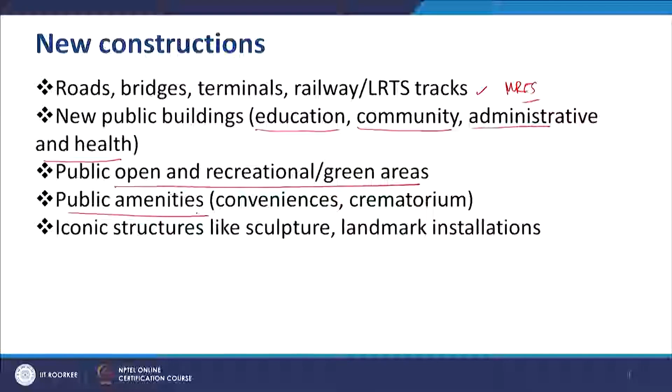Then we make public amenities, for example public conveniences and public crematoriums - all these are required. Iconic structures like sculptures and landmark installations - sometimes we make landmark installations at road intersections or in terminals, so that it can create an iconic landmark structure for the building. We create sculptures and all landscaping elements, street furniture, and sometimes underground utilities, which also help people in various ways. Those kinds of construction are required in urban local bodies.

At the same time, we do repair and maintenance - roads need regular repair work and maintenance work. Most of the time municipal engineers are busy with road repair and are not able to devote their time and attention to any other work, because roads are such a matter which needs regular supervision and maintenance due to adverse weather conditions throughout the year.

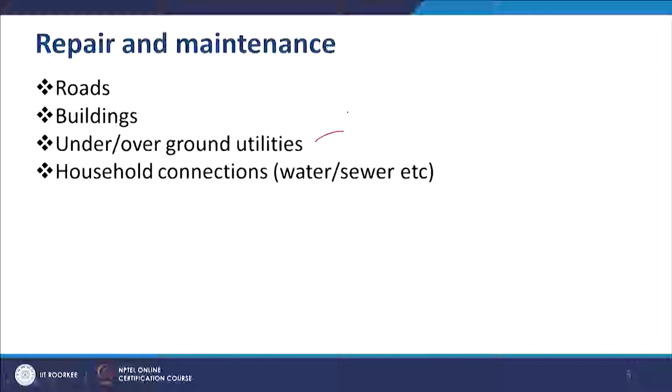Buildings also need significant repair and maintenance. Underground and overground utilities, for example, the sewerage line, drainage line, electrical line, water supply pipeline - so many networks are there in the cities which we need to maintain on a regular basis. Household connections, water, sewer, drainage cleaning, etc.

Now all these are dedicated work, and what major municipal corporations or cities have started doing now is to integrate all the service pipelines in a common duct. They are making a common permanent duct, and within that major duct they are accommodating all the pipelines like this.

So this kind of installation is also possible, but definitely this is costly. But even if it is costly, this is permanent - a person can enter and repair this. So this is called a permanent common utility duct, and this kind of trend is also coming in a big way in our cities.

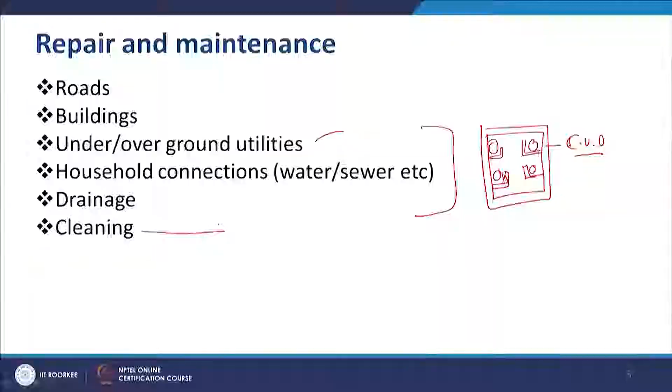Then cleaning is another regular maintenance work in our cities. Every day municipal workers need to clean the road and other public places. So what kind of considerations must we take for the engineering design?

First, I would like to take an example just to recall that you might have seen the great public buildings or public infrastructure created by the earlier generation. They are very nice, permanent and nicely maintained. But in the current generation, sometimes due to lack of cost or lack of attention to minute engineering details, it sometimes lacks that kind of finish and durability in terms of the lifespan of the building.

So why not we also create buildings and infrastructure which are durable, good looking, giving a pleasant effect, and also giving essential utilities and benefit to the citizens for long years. So the major considerations for such engineering design: number one, it should be durable for a long lifespan.

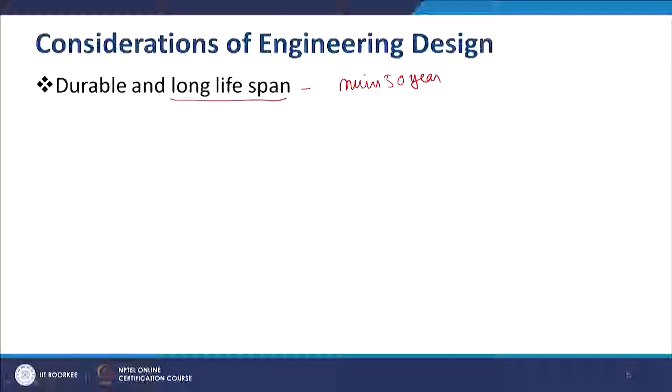When I say long lifespan, it should be minimum 50 years. If you see the major municipal infrastructure created during the British period, colonial time, more than 100 years back, it is still performing well in some cities like Kolkata, Chennai, Delhi or Mumbai.

And for the infrastructure we are creating in today's time, it should have a minimum lifespan of 50 years. Then, safe and permanent - the infrastructure should provide a safe, secure and permanent facility to the citizens with minimum maintenance and repair. It should have optimum cost.

I am not using the term minimum cost, because if we only focus on minimum cost and not quality, definitely the durability and other aspects of the project may not appear. Therefore, considering quality in all respects, the cost should be optimum.

Definitely we are not going to spend too much cost for a particular infrastructure, but keep this in mind: if just for the sake of construction you build one building or infrastructure and after one or two years it becomes fragile and becomes an additional liability for you, it is not desirable. In our municipal governance there are already a lot of liabilities in terms of infrastructure and manpower, so do not add another liability within one or two years.

So make a permanent investment in infrastructure which is durable, good looking and safe. Such infrastructure is possible if you really focus on quality, and the cost can be optimized.

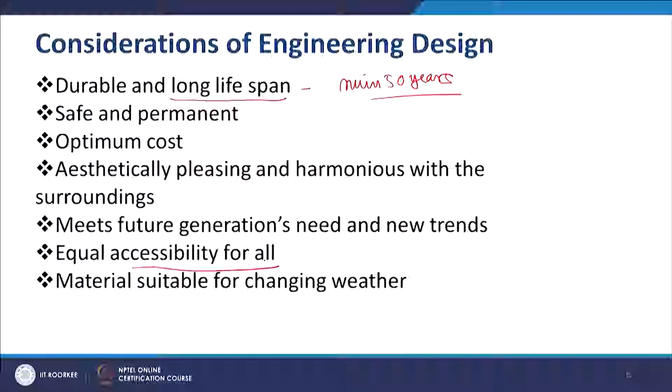In India we have a variety of weather situations, so based on the weather situation at your workplace, you should choose material which should be permanent in nature. And for sustainability, you should think about repair, change, replace and dispose.

I told you that you should not choose a project only based on capital investment. In a project, if you find that capital investment is less, but recurring expenditure like repair, change, replace, dispose is much more, then you should not choose those kind of projects. Whereas if the capital investment is little higher than the minimum, but the repair, maintenance and operation is much lesser and manageable and sustainable, those kind of projects should be given maximum priority.

Having said that, I will mention a few common design and planning terminologies which you will understand as a non-technical person, and this will also benefit technical persons. Now, a few general terminologies we use in municipal governance are cost benefit analysis, break even cost, and levels.

Cost benefit analysis is basically the ratio between the benefit and the cost. So if the benefit is higher than the cost, it should be more than 1.

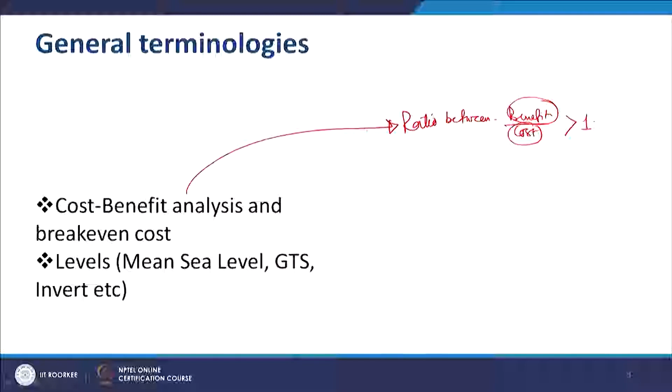In a break even situation, our benefit in terms of financial benefit is equal to cost, that means there is no loss and no profit, and most public infrastructures are built this way. But I feel that even in public infrastructures the cost benefit ratio should be more than 1, so that there is some surplus amount which can take care of the sustainability of the projects.

There are various kinds of levels we use in engineering design. For example, in most cases we measure the level based on the mean sea level, in short called MSL. In some cases the GTS level is used.

GTS is nothing but, in the British period, there was a Great Trigonometrical Survey by the then Surveyor General George Everest, and based on that survey, even now, we take GTS levels in making land filling or public infrastructure in cities and regions. So sometimes GTS levels are also used.

In some cases the invert levels are used. Invert level is the bottommost level of any trench. So if this is the ground level and this is a trench, then this is the invert level. So these are the few common terminologies.

Then I'll tell you a few other terminologies like statutory approval. Statutory approval is basically legal approval. The opposite of statutory approval is non-statutory approval.

For example, you are making a project report and getting it sanctioned by your funding agency, so that is not statutory approval. Whereas you are making a city development plan, and the city development plan needs to be approved first by the board of councillors or the mayor and council, as the case may be, and then it needs to be approved by the state government or the district planning committee or metropolitan planning committee. So those are the approvals termed as statutory approval.

Similarly, when a common citizen submits a building plan or development permission, the approval given for that development is called statutory approval for construction of the building. Now statutory approval could be for the building, could be for the land use, could be for the infrastructure, or both. So statutory approval must every time be mentioned under some law, usually in the Municipal Act, Town and Country Planning Act, or Land Registration Act and so on.

Similarly, terms like mutation, sanction drawing, working drawing are very much popular in municipal governance. Mutation is the process of changing the name of ownership of land. So when you purchase or sell land, you need to transfer the land from person X to person Y. That happens in the land registration department, and when you transfer that changeover from the land registration department to the municipal office, that process is called mutation.

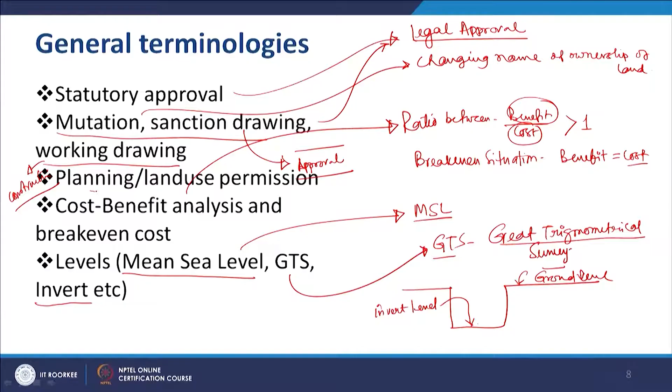So sometimes your role will be as an approval authority, sometimes your role will be as an authority asking for the approvals. Planning and land use permission is given, in most of the cases, under the Town and Country Planning Act.

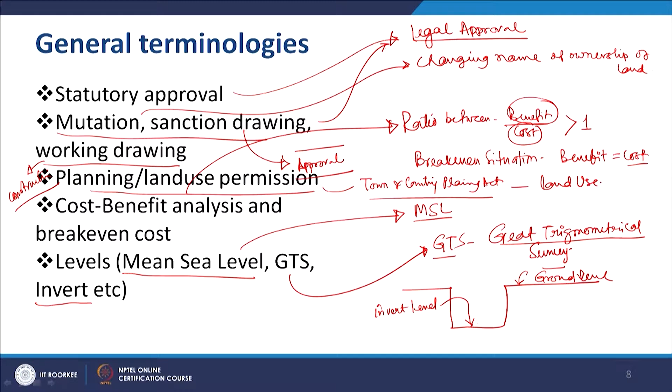It is the permission of the land use. For any construction of a building or infrastructure, you need to take the permission of the land use in particular. So that permission is called planning permission or land use permission.

In most cases, development authorities or metropolitan development authorities are entrusted or delegated this power. In some cases, municipal authorities can also exercise this power if it is given by the state government for the land use permission. After the land use permission, they can go for the statutory permission for the building and the infrastructure.

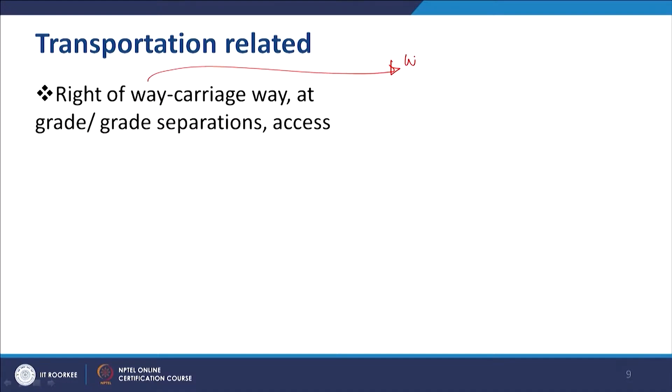After that, there are a few terms related to road and transportation which we use in everyday work. For example, right of way and carriageway. Right of way is the whole width of the road.

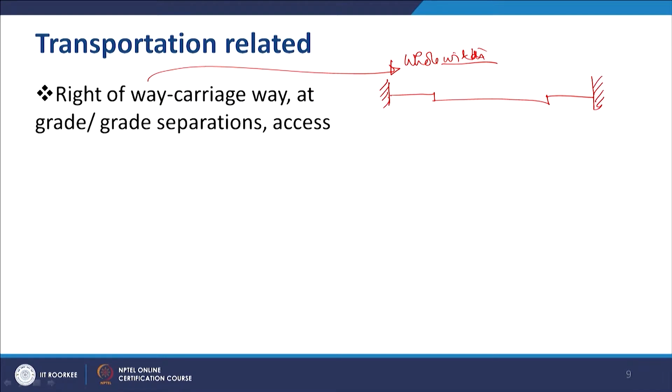For example, this is a local road. So this is the property line, and this is also property line, and this is the footpath, and this is the area for the vehicle. So this particular stretch which is used for the vehicle is called carriageway, whereas the whole width of the road which is available is called right of way.

So usually carriageway is lesser than right of way, because right of way consists of everything like carriageway, footpath, cycle track, landscaped area, areas for the networks, everything. I have just drawn a very simple section of a local street so that you can understand.

Then grade separation. Grade is basically the level where the road passes. For example, I am showing a traffic intersection, a typical traffic intersection which is happening in the same level, without any level difference, where all the journeys are maintained at the same level, either using a signaling system or some roundabout. So this kind of level and intersection is called intersection at grade.

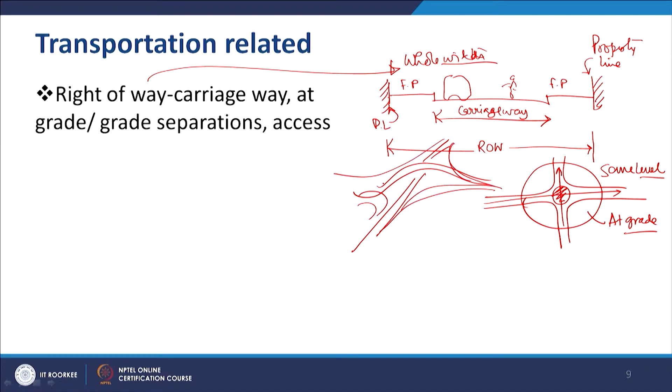At grade means mostly at a single level, and in some cases we can use flyovers like this. You must have seen flyovers like this. So if this kind of arrangement is done, this is called grade separation.

Grade separation is basically separating the grade into various levels, so that one particular movement is given an uninterrupted flow by making various grades. So this is a term used in making transportation planning, making new flyovers, upgrading existing flyovers or existing traffic intersections.

Access is a common term, but it is also a technical term in terms of whenever you are going to give permission for a building, every building or premises must have a means of access, and without the means of access the building permission cannot be given.

So the first thing which you should check is the land ownership document for giving any permission. Second is the means of access. If there is no acceptable means of access, sometimes municipal authorities make a benchmark that a means of access less than 3 meters cannot be given building permission. So those kinds of stipulations are there. Access needs to be checked before giving any permission.

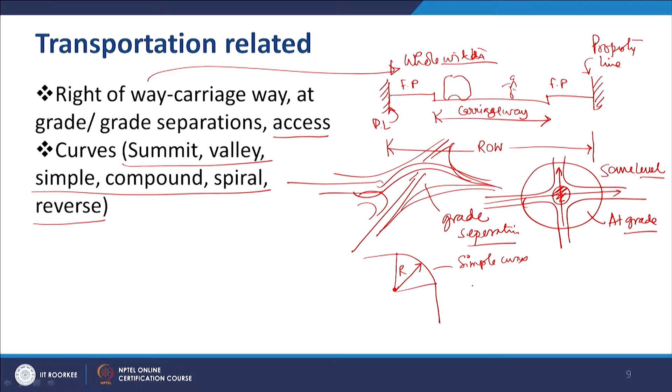Further, we use various curves like summit curve, valley curve, simple curve, compound curve, spiral and reverse curve. In this kind of traffic intersection, when there is a curve like this, it is called a simple curve, having only one center and radius. Then we can make a compound curve, which has more than one radius.

We can have a spiral curve, which we use mostly in traffic intersections, or we can have a reverse curve, something like this.

Then we can have summit curve and valley curve. Summit curve is when a flyover is made like this, utilized for reaching the topmost portion of a flyover. Valley curve is taking the vehicle from the ground level to the higher level. So these are the terminologies related to curves we use for geometrical design of roads, horizontally and vertically both.

Geometrical design of the roads horizontally, vertically, or other than roads we can also design flyovers.

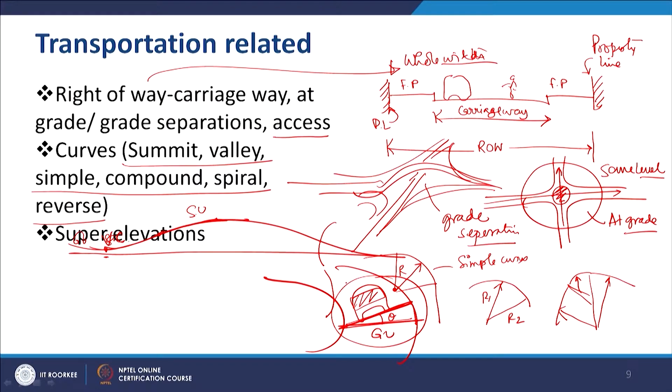Then super elevation, as you know, is used when we calculate the turning of a road and vehicle. When a vehicle turns along a road there is a super elevation by which, if this is the ground level and this is a turning, this should be the new level. This angle is required to maintain the speed of the vehicle and to maintain its safety. So this phenomenon is called super elevation. It is an essential design element which we maintain whenever there is a curvilinear pattern of any road or flyover.

Then there are terminals. Terminals are basically the termination point of any transportation network. It can be a railway terminal, a bus terminal, or a metro rail terminal.

TOD is basically transit oriented development. In many cities in India there are metro rails or mass rapid transit systems being developed. Along the mass rapid transit system, high density compact developments are being encouraged. That kind of development based on compact high density walkability and a mass rapid transit corridor is called transit oriented development. In cities like Mumbai, Calcutta or Delhi, the suburban railway system is also based on transit oriented development.

Trips, as you know, a trip is basically a unit of transportation - travel from place A to place B by any means is called a trip. A trip could be educational, for home and office, or for any recreational purpose.

Travel demand is the demand in terms of trips, the number of trips from one zone to another zone. That is calculated based on the demand, and it is calculated based on surveys. Traffic volume is the traffic volume at a given point of time at any cross section of a road.

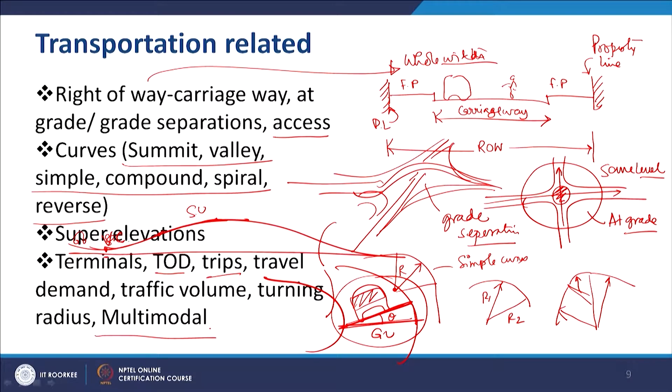Nowadays we use multimodal terminals. Multimodal terminal is a common and very popular concept, where from one terminal people get all the facilities of transfer from one mode of transport to another. For example, you are traveling by metro rail, and after getting down from the metro rail you get another suburban rail, bus connection, tram connection, non-motorized transportation, or even walkability. So that kind of integration of various modes in one point under one roof is called a multimodal terminal.

Then drainage and sanitation related terms are very common, which you use every day. For example, storm water - storm water is basically water accumulated due to rain. Runoff is the phenomenon of the flow of water on a given surface. Runoff is usually calculated based on the surface condition and the quantity of water accumulated on that surface.

Check dam is used when there is a flow of water like a river. A check dam is used to control the water, control the river water, and after controlling it, to use the river water by desired means. So that is called a check dam.

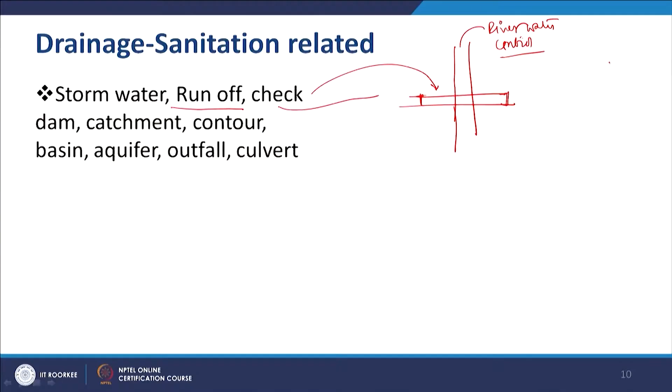Catchment is a technical term used in drainage and other purposes also. Catchment, as I discussed earlier, is a geographical area which accumulates the water of a particular basin. If there is a river like this and the surrounding areas, the water of the surrounding areas is collected into that river, then that is the catchment area of that river, and the whole area is also called the basin area.

Aquifer is the term used for the levels below the ground level. If this is the ground level, then there are several layers, and below some layers there are layers of water. That water layer below the ground level is called aquifer.

Why is this important? Because the level of the aquifer will help you determine the depth of your foundation, depth of various underground installations, and also, in some cases when you need to take water from the aquifer, this data will be required.

This data is available on Government of India websites, and aquifer is a very common term in normal drainage and sewerage construction. Outfall is a natural element like a river, lake, or canal where the runoff due to storm water will discharge. Outfall is another technical term used here. For example, in this case, the river itself is the outfall of this water.

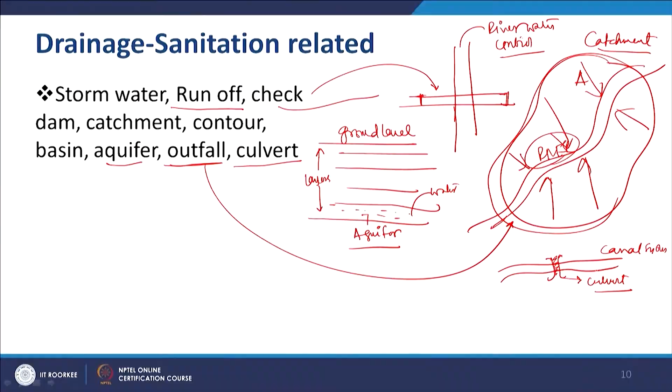Culvert is used to make a temporary or permanent way along a river or canal system. This is a canal system, and we can make a permanent or regular culvert. The purpose of a culvert can be many, starting from regular pedestrian connection to network connection. So many purposes can be there.

Apart from that, there are terms like sullage, sewage, sewerage, dry weather flow, sludge, septage, rubbish, sedimentation, etc. Sullage is basically the wastewater coming from your kitchen. Sewage is basically the wastewater coming from the kitchen plus the wastewater coming from your toilets. Sewer is the pipeline which holds the sewage, and sewerage is the system which connects not only the pipeline but also the treatment plant and everything. So sewerage is the system.

Sewage is basically coming from kitchen water, and from the toilet we get black water. So it is sullage plus black water from the toilet, and also dry weather flow. Dry weather flow is basically the flow in the sewerage system other than the rainwater flow.

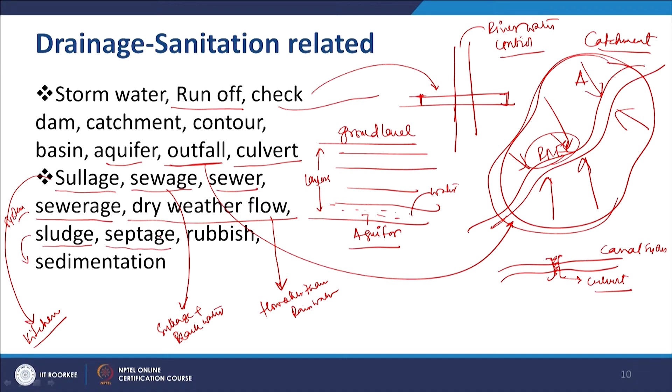Then sludge. Sludge is the decomposed liquid which is discharged into a sedimentation area after treatment. Septage is the science of sewerage and sanitation using a septic tank, that is called septage. Rubbish is the construction and other waste which is collected at municipal constructions or various activities, and also treated and disposed of in some other particular place.

So these are a few terminologies we commonly use day to day for sewerage and drainage. Then there are a few terminologies related to building construction. Admixtures are various mixtures used in building construction: cement, concrete, stone chips, sand - all these are admixtures.

Area, FAR, ground coverage. Particularly after RERA, which we discussed - the Real Estate Regulation and Development Act - we use carpet area. Carpet area is basically the usable area within an apartment. If we add the area of the walls and a few common areas, it becomes built up area. So built up area and carpet area are both very important terminologies used in building construction.

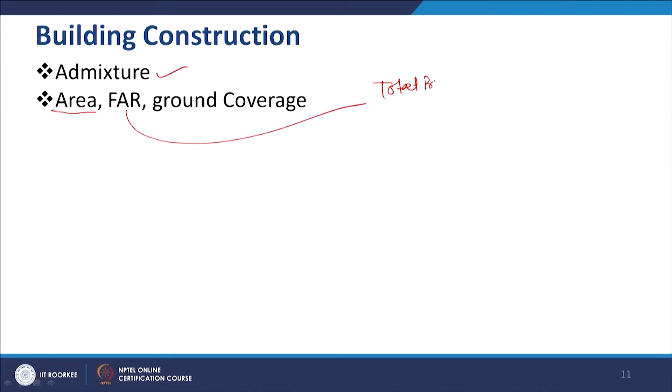FAR is basically the total built up area divided by the plot area. Usually it is more than 1, it can be 1, 2, or 3. Usually you can check your local bylaws to see what applies.

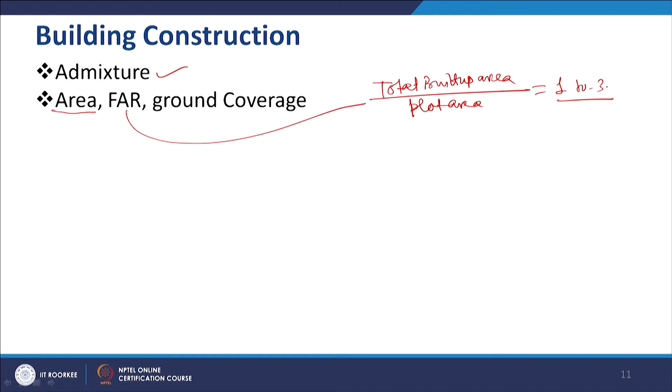Ground coverage is - if this is the plot and this is the building premises - so if the total area is A and the covered area is small a, ground coverage is basically small a divided by A, expressed in percentage. So this is the ground coverage.

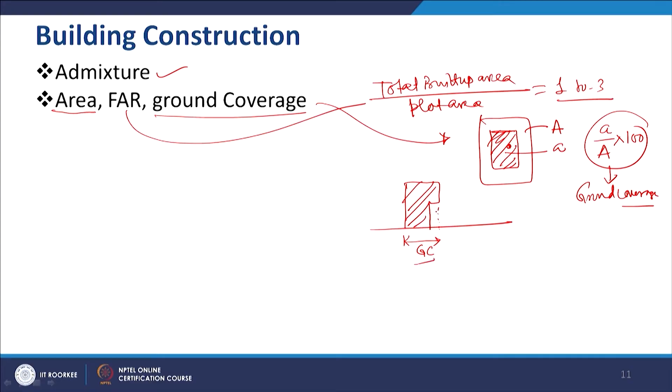One common confusion people make is that if, in elevation, a building has some projection like this, the projected area also comes under ground coverage. So do not be confused that projected area is also included in ground coverage. It is not that you keep a setback at the ground level and then at a higher level just make projections - it does not work that way.

Then balcony, terrace, and veranda. Balcony is basically a projected area like this - that's a balcony. A terrace is a completely open to air area - that's a terrace. And veranda is basically a balcony, but which is covered by the floor above.

Balusters and balustrades - whenever there is a railing, there are vertical supports for holding a handrail, and these are called balusters. When a series of balusters are together, it is called a balustrade.

Then there is cast in situ, which means the concrete or any element is being cast on site. That is called cast in situ.

Compressive strength of concrete or any other material is the strength required to withstand compression when you compress from both sides. Tensile strength is the strength required to withstand tension, or when we pull the material. For example, concrete has better compressive strength, and steel has better tensile strength.

RCC and PCC, I hope you know - reinforced cement concrete, plain cement concrete. Precast and prefabricated concrete and other elements are also very popular in current construction.

Formwork is the external structure done temporarily to cast the actual structure - that is called formwork.

Cladding is the external surface which is required over the wall or over any architectural piece.

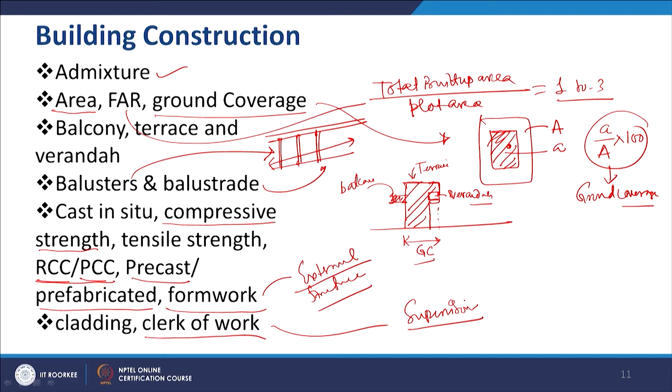Clerk of works is basically a supervisor who is responsible for the day to day quality supervision of a project. So whenever you do a building project or any infrastructure project, you need to have a clerk of works, which should be included in the project cost.

Then there are a few other construction terminologies like aggregate, coarse aggregate, fine aggregate. As per the code, there are standards for how we identify coarse and fine aggregate. For example, sand is there, stone chips are there. Usually stone chips are the coarser aggregate, and sand and cement are the fine aggregate.

Building loads could be dead load, live load, wind load, and seismic load. Dead load is the weight of the building; live load is the weight of living things including humans and plants. Wind load is calculated wherever the intensity of wind is much more, especially in coastal areas. Seismic load is also calculated in coastal and seismic-prone regions. All these loads are considered during structural design by engineers.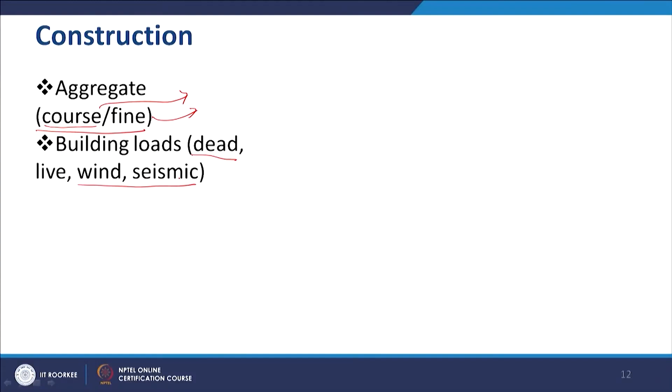There are expansion joints between two parts of a building, which are important. Usually as per the code it is a minimum of 25 millimeters. These kinds of joints are very common when you construct a large building.

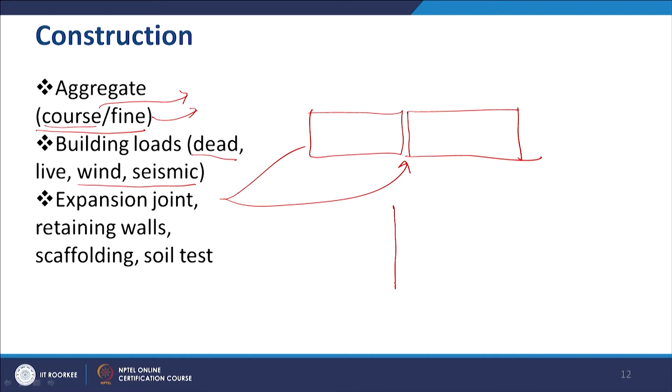Retaining walls are required to withstand the load of a higher built form. This kind of structure you must have seen mostly in hill areas - retaining walls are built to withstand the load of the earth mass so that it does not fall.

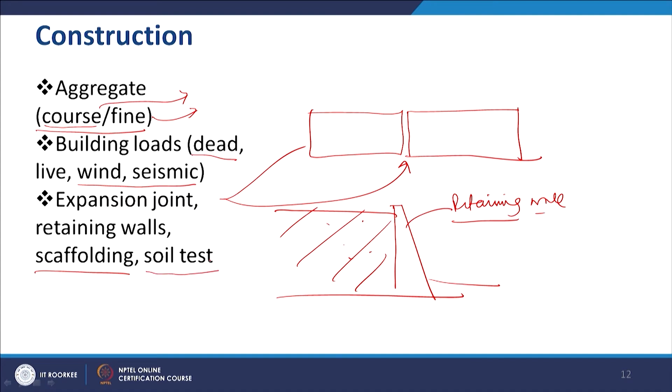Scaffolding and soil test are also temporary structures required to make the formwork of the building structure. Soil test is done for every construction before it starts, so that the design can be based on the soil test - it gives the criteria for designing the foundation of the building.

Stirrups is basically the steel member which binds all the reinforcement of a concrete structure, and it is very common in concrete construction. So I just mentioned a few common engineering terminologies for your better understanding.

You must have heard many of these terminologies, but those working at municipalities or urban local bodies are familiar with these common terms, though some of you sometimes have confusion between them. That is why I discussed this, but I will definitely share reference material so you can read and understand more.

Having said that, the next lecture will be another lecture on project management. We will discuss how we can manage transport and large municipal projects.

So, I would like to quickly summarize and conclude today's lecture. Today we discussed various aspects of engineering design. We noted that in earlier generations people made fantastic engineering designs and pieces of infrastructure which are durable, permanent, and require less repair and maintenance.

In the current generation also we can do that. There are several considerations for the engineering design of infrastructure that we discussed, and in the end we mentioned various common terminologies related to building plan sanctions, building construction, road and transport, drainage, sewerage, and sanitation. So I hope you got some idea about engineering design.